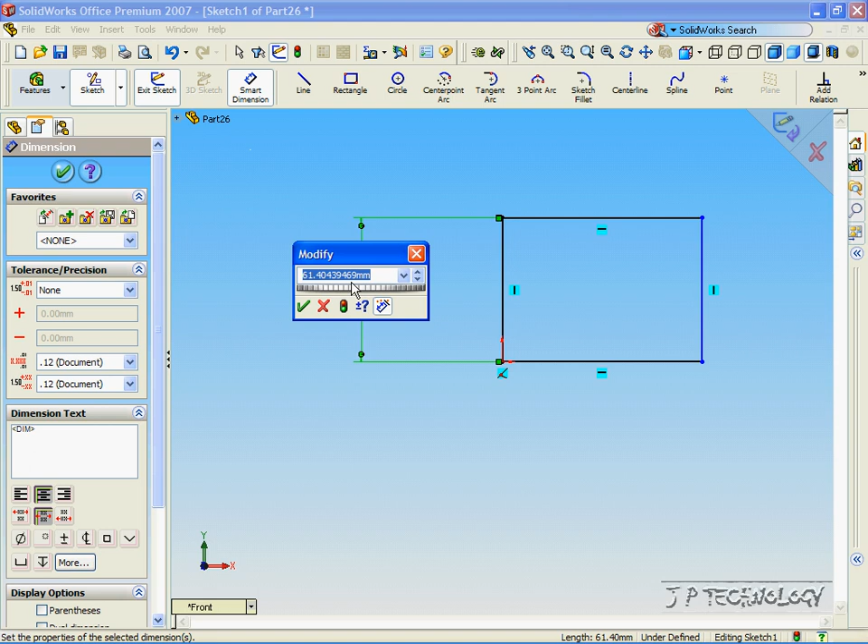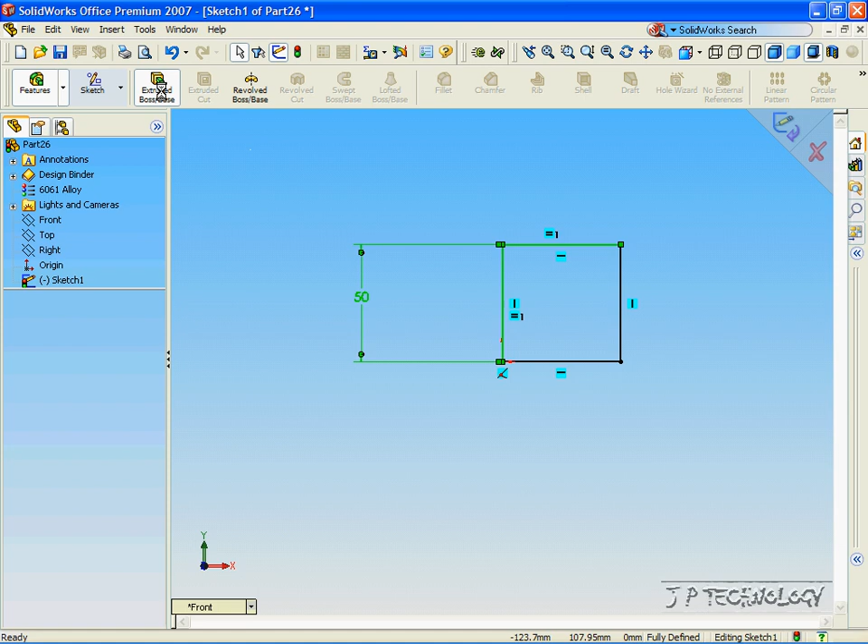Click OK. Now let's click the Add Relation button and click the line that we just dimensioned and a line that's perpendicular to that, and let's make them equal. Click OK. Now to extrude it out, let's click Features, let's click Extrude, and we'll extrude it out 50 millimeters. Click OK. And now we've created our perfect square to work with.

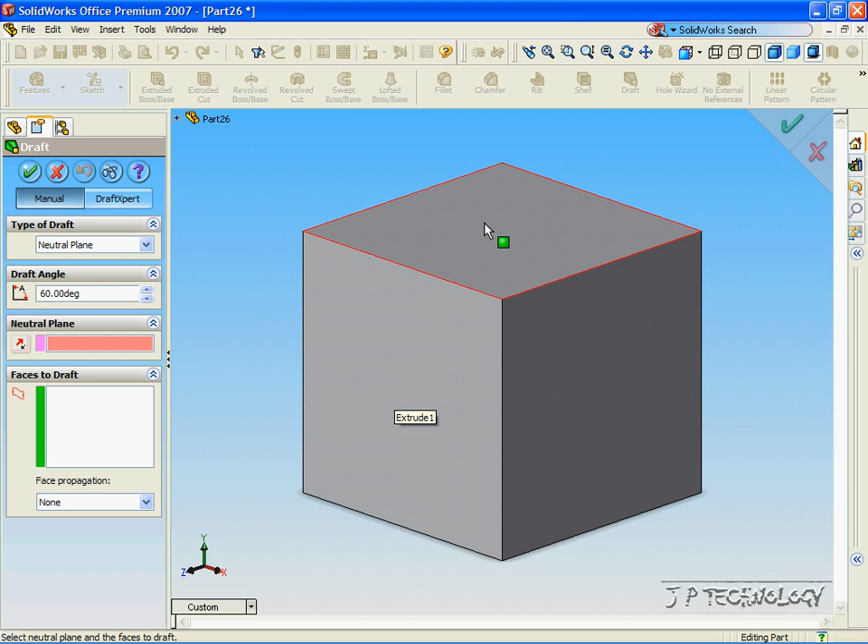Now click Isometric View. Now to draft off of this square, let's click Draft Function. Now how the draft function works is that we need to click one neutral plane and then one plane that we're going to draft off of. So let's say we want to draft from this surface here. We need to click this plane as the neutral plane, and then we have to click this face as the face that we want to draft off of.

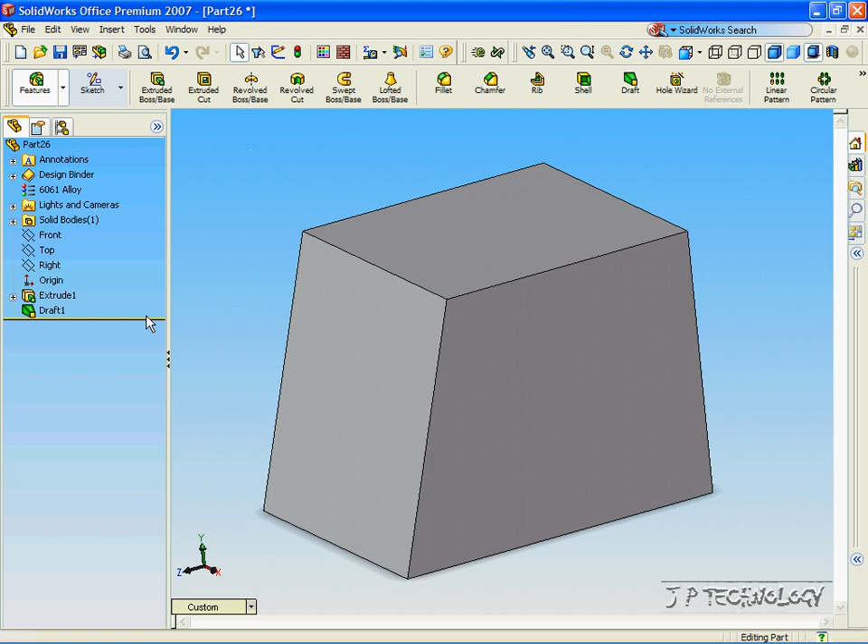And now let's change the angle to 15 degrees. Click Enter, click OK, and now we've drafted 15 degrees out from that face. Now with this function, like others, it's easy to manipulate it, so right click the draft, click Edit Feature, and let's change the angle to 45 degrees this time. Click OK, and now we've drafted that side out 45 degrees.

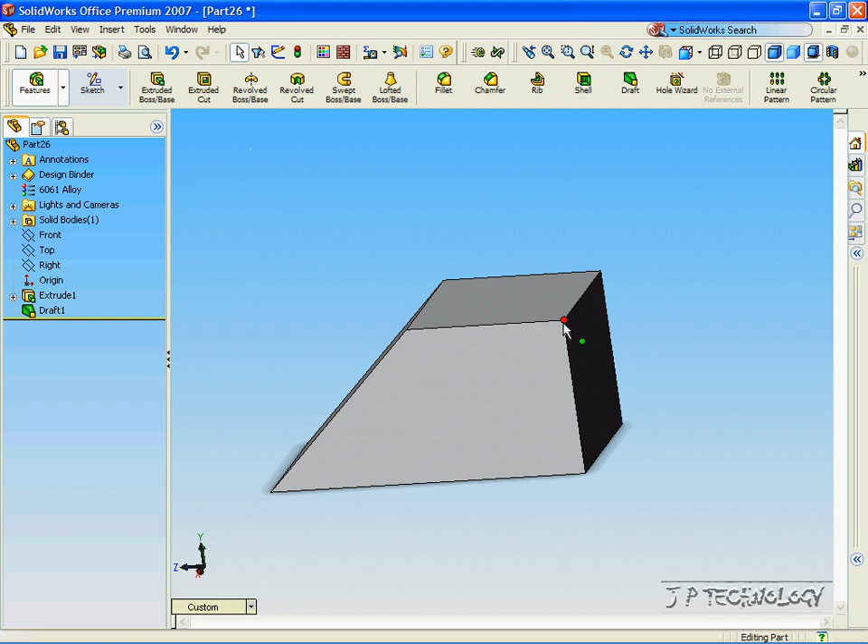Now, as we can draft out, we can also draft in. So instead of drafting out that way, from this face, we're actually able to draft in that way and cut out a piece. So this time, let's click Draft. Let's click the neutral plane again, and we'll click this face.

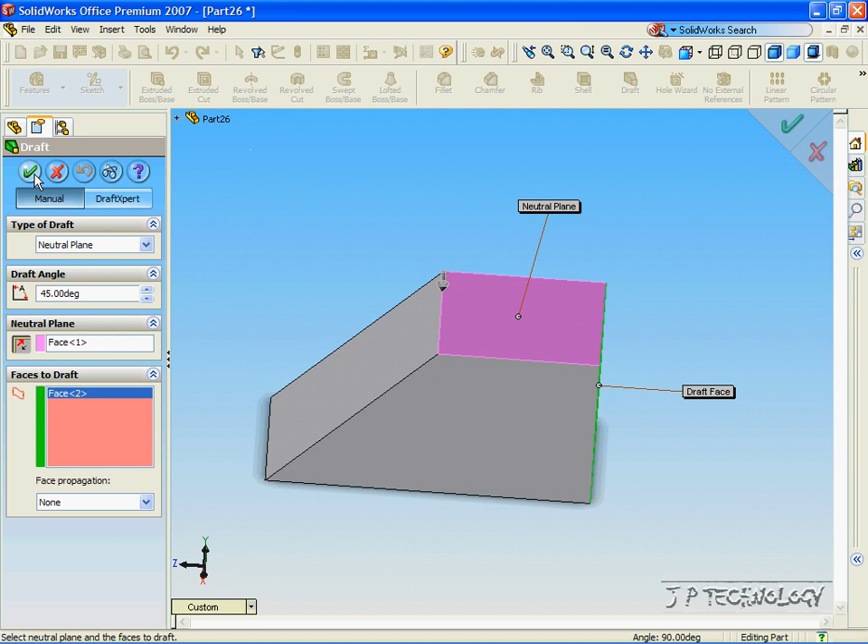To make it go inside and cut, this time, we'll click the arrow, the directional arrow, and make it point in. Click OK. And now it's cut inside and it's drafted in. And this concludes our tutorial on the draft of the neutral plane axis.